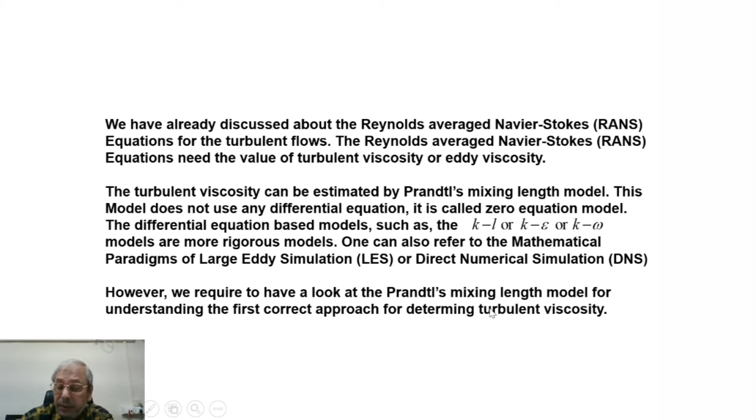Now, in the case of turbulent flow, velocity, pressure and temperature at a fixed point in space do not remain constant with time but perform very irregular fluctuations of high frequency. The velocity of the fluid in turbulent flow can be represented by two components, mean motion and fluctuating component. We have already seen this.

The velocity of fluid is given by u equal to u bar plus u prime, v equal to v bar plus v prime. This is the fluctuating component. w equal to w bar plus w prime. Similarly, p equal to p bar plus p prime, and temperature T equal to T bar plus T prime.

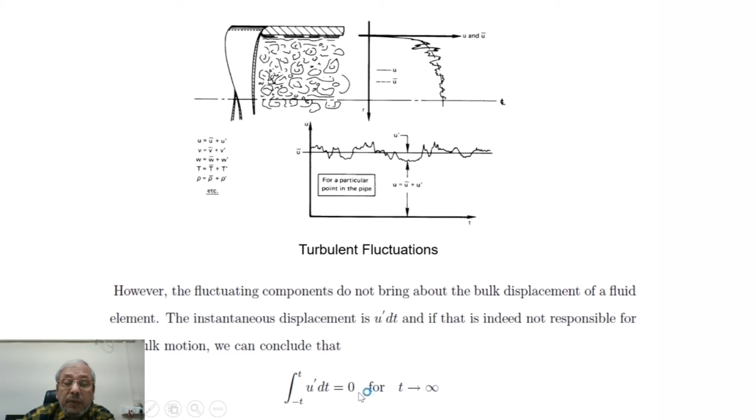However, the fluctuating components do not bring about the bulk displacement of a fluid element. The instantaneous displacement is u prime dt, and if that is indeed not responsible for the bulk motion, we can conclude that between the interval of minus T and plus T, the integral of u prime dt equals 0, where T tends to infinity.

Due to the interaction of fluctuating components, macroscopic momentum transport takes place. Therefore, the interaction effect between two fluctuating components over a long period is non-zero, and if we perform the integral of u prime v prime dt in the time domain, this is non-zero. So the u prime dt integral is 0, but u prime v prime dt is non-zero.

We take the time average of these two integrals and write u prime bar equal to 1 by 2T times this integral, which is equal to 0 when u prime is being integrated. But u prime v prime bar equals 1 by 2T times the integral of u prime v prime dt, and this is non-zero. So u prime v prime over bar is non-zero. Similarly, v prime bar, w prime bar, p prime bar and T prime bar are 0.

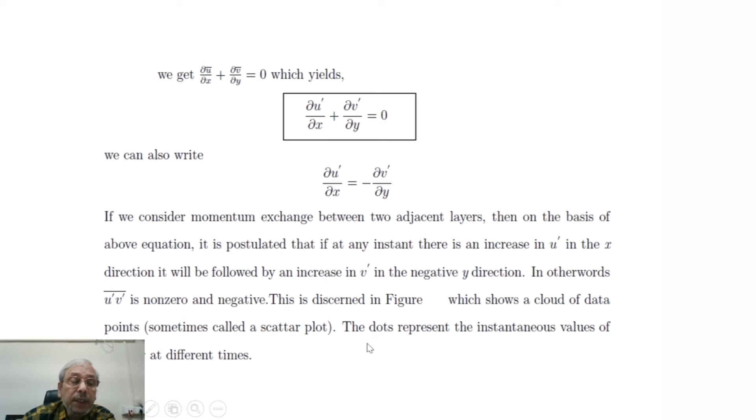Let us consider a plate and the formation of boundary layer on the plate: turbulent flow over a flat plate. For unit area of the plane PP, the instantaneous turbulent mass transport rate across the plane, because of fluctuation, has to be rho into v prime. Associated with this mass transport is a change in the x component of velocity u prime.

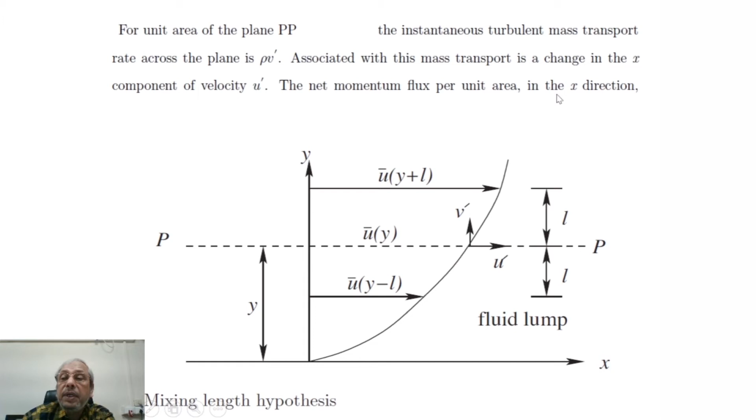So whenever there will be any fluctuating component in the y direction, which is v prime, it will be accompanied by a fluctuation in x component, u prime, and if v prime is in the positive direction, then u prime will be in the negative direction. Why? The net momentum flux per unit area in x direction represents the turbulent shear stress at the plane PP, which is rho u prime into v prime.

When a turbulent lump movement is in the upward direction, that means v prime is the fluctuation, we can write v prime greater than 0. It enters the next layer, a region of higher u bar, because this is the variation of u bar, the mean velocity profile. So it is likely to effect a slowing down fluctuation in u prime. Whatever is the value of u bar here, at the slightly upper level, u bar is more.

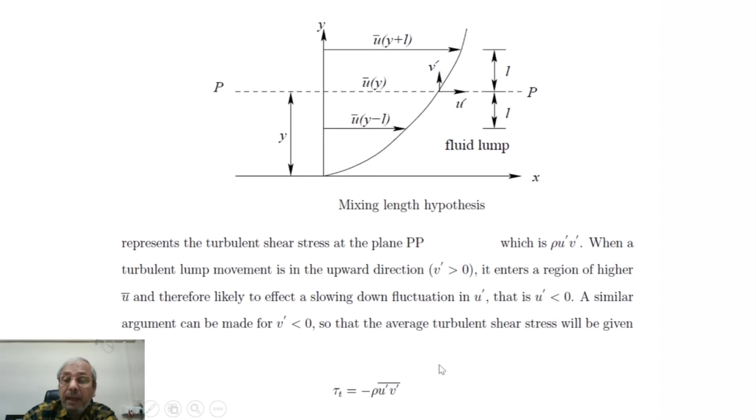Again, let us imagine a turbulent fluid lump which is located a distance L above or below the plane PP. These lumps of fluid move back and forth across the plane and give rise to the eddy or turbulent shear stress effect. At y plus L, this L is very small, the velocity would be U bar y plus L. If we expand in Taylor series, this will be U bar y plus L del U bar del y.

While at y minus L, we can write U bar y minus L equal to U bar y minus L del U bar del y. And again, let us recall that L is very small, so that we can expand these expressions in Taylor series.

Prandtl postulated that the turbulent fluctuation is proportional to the mean of the above two quantities. So if we try to get turbulent fluctuation from these two expressions according to Prandtl, U prime is proportional to L into del U bar del Y, or this proportionality is converted into constant equality. We introduce a constant: U prime equal to C1, an arbitrary constant, L del U bar del Y.

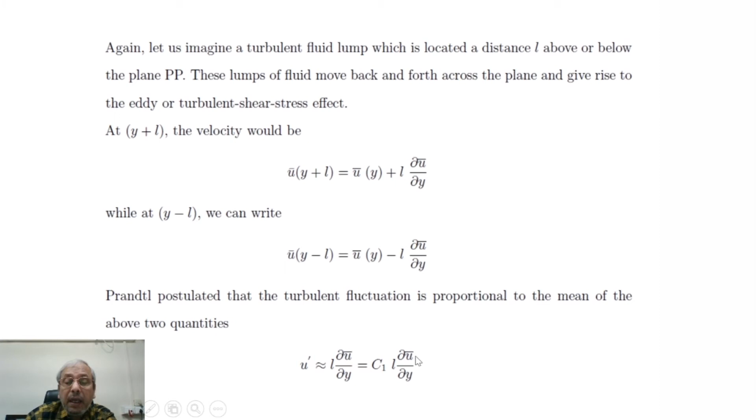Here L is the Prandtl's mixing length. This is analogous to mean free path, that is the average distance a particle travels between two collisions according to kinetic theory. Now in molecular transport problems, the way we define the average distance a particle travels between two collisions, that is mean free path, Prandtl's mixing length in case of turbulence mixing is analogous to mean free path for molecular transport problems.

Prandtl also postulated that V prime is of the same order of magnitude as U prime, so that V prime can also be written as another constant C2 L del U bar del Y. Now the turbulent shear stress is given by minus rho U prime V prime over bar. So we can write rho L square del U bar del Y whole square from the expression of U prime that we got and the expression of V prime. And we can clearly see C1 and C2 can be included in the unknown mixing length.

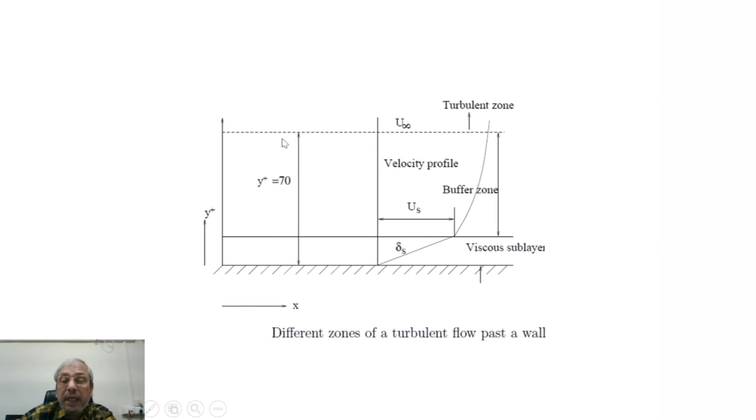A very thin layer next to the wall behaves like a near wall region of laminar flow. That's this region I'm calling the viscous sublayer region. The layer is known as laminar sublayer, and its velocities are such that the viscous forces dominate over the inertia force. Again, in this figure, no turbulence exists in the sublayer.

As it has been stated, in the near wall region inertia effects are insignificant, and we can write nu del 2 u bar del y2 minus del y of u prime v prime over bar. So inertia terms are not there on the left hand side. For flow over a flat plate, pressure gradient is 0, and the viscous term together with the turbulent shear stress term are the stress components on the right hand side.

So we can write nu del 2 u bar del y2 minus del u prime v prime over bar del y equal to 0, which can be straightforwardly integrated as nu del u bar del y minus u prime v prime equal to constant. Just integrate with respect to y.

Again, we know that the fluctuating components vanish near the wall. Very close to the wall in the sublayer region, they do not exist. So the shear stress created on the wall is basically created by the average velocity. So nu del y of u bar equal to the shear stress by rho. Actually, mu del u bar del y is tau w. Since we are taking nu here, we are dividing tau w by rho.

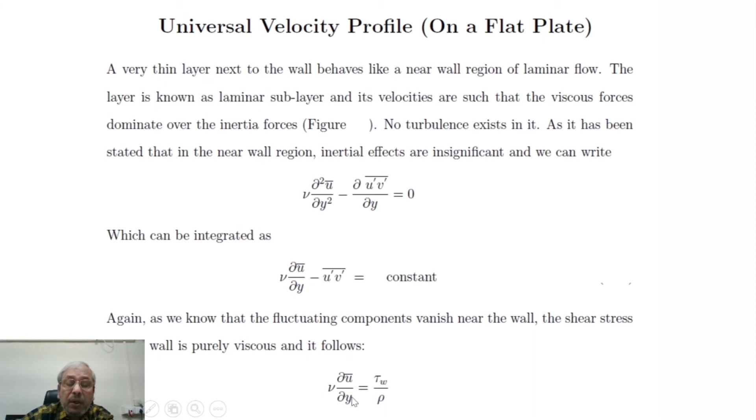We are transferring nu to the right hand side, and over a very small distance from the wall, we are writing this as u bar minus 0 divided by y minus 0 equal to tau w divided by rho into nu. And tau w by rho can be substituted by u tau square.

So tau w by rho we are substituting by u tau square, and we are writing this as u tau square by nu, where u tau is given by root over tau w by rho, and this u tau is known as friction velocity. This is friction velocity.

So from the aforesaid expression, we can rearrange and write y u tau by nu equal to u bar by u tau. And this gives us a non-dimensional coordinate which is called y plus. It is defined as y plus is equal to y u tau by nu. It's a non-dimensional distance given by y plus.

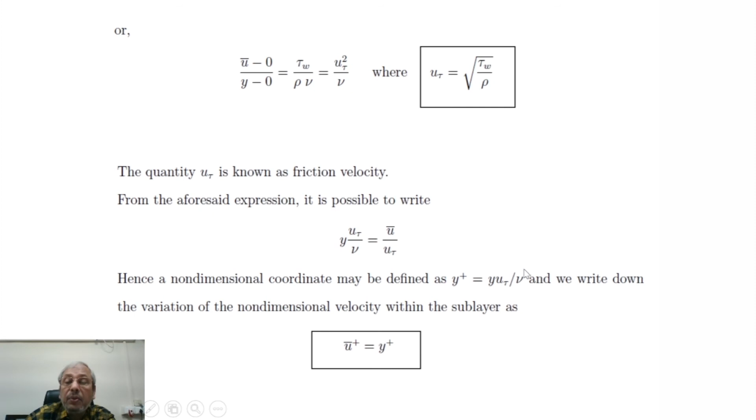And we write down the variation of the non-dimensional velocity. This non-dimensional velocity we write as u plus. So u bar plus equal to y plus, and within the very thin laminar sublayer, this is a linear relationship. U bar plus equal to y plus, and this is in y plus scale. Y plus scale is very small. If we try to estimate, we will be able to appreciate that.

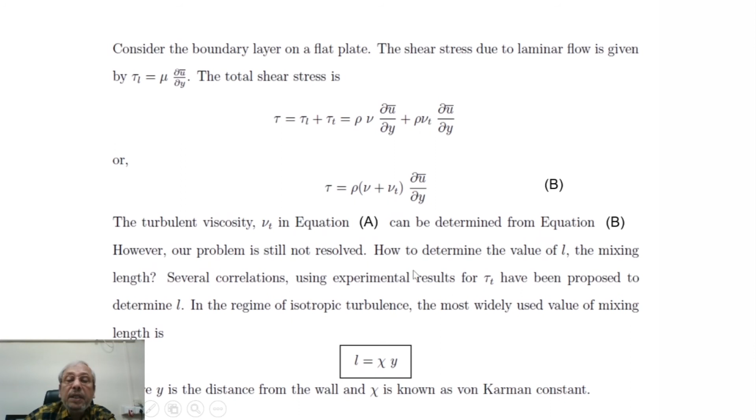In the turbulent zone, the turbulent shear stress from Prandtl mixing length model, we have already seen, if this is L, shear stress is given by nu T, and nu T is given by L square du dy. So now we can write tau T is equal to rho L square du dy into del U del Y. So basically nu T is L square du dy multiplied by del U bar del Y. So we can write tau T equal to rho L square del U bar del Y square.

Where L is the mixing length given by chi into Y, and chi is the von Karman constant. If L equal to chi Y, we can write tau T by rho will be chi square Y square, where Y is the distance from the wall, del U bar del Y squared. So tau T, turbulent shear stress in the turbulent region. We are now not in the viscous sublayer region. We are considering the dynamics in the fully developed turbulent flow.

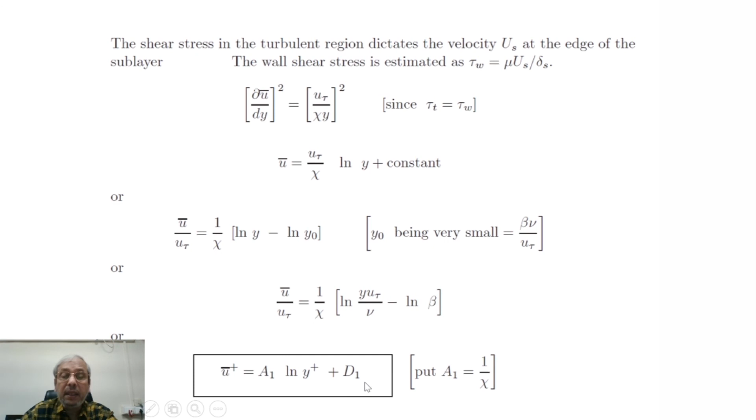These constants were determined from experiments. For smooth ducts or smooth plates, A1 has been observed as 2.5 and D1 as 5.5. So we can write U bar plus equal to 2.5 ln Y plus plus 5.5. Also, in a slightly different way, we can write U bar plus equal to 2.5 ln E Y plus. Instead of writing the constant separately, we can write the entire quantity in this bracket with ln, and then E will be 9.0 for smooth walls.

Finally, log law is defined for the turbulent zone as U bar plus equal to 1 by chi ln E Y plus, uppercase E. The constant chi is known as the von Karman constant. The location where log law profile and linear profile meet can be calculated. So it is really of interest to find out this distance in Y plus where the log law profile, the profile for the fully turbulent zone, and the linear profile, the profile for the viscous sublayer, merge or meet.